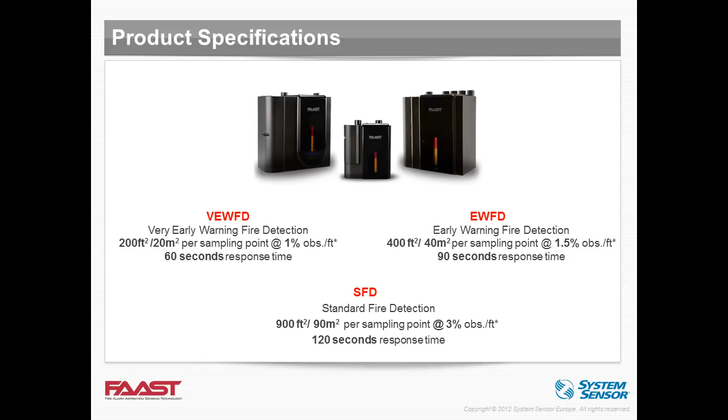For starters, I'd like to mention again how we position the holes of an aspirating system, which you're probably all familiar with. Every hole, every sampling port located on the pipe, reflects the positioning of a smoke detector, because this is what the aspiration system detects.

Obviously, you can make the distances or spacing smaller. You should not ever exceed the distances that the regulators, local AHJs, or regulations allow. If you consider that those small dots you saw in the previous slide were the spot or point detectors, when you connect the dots, you'd have exactly the same or very similar configuration on the ceiling or elsewhere, wherever required, where the sampling port is at the place of the smoke detector.

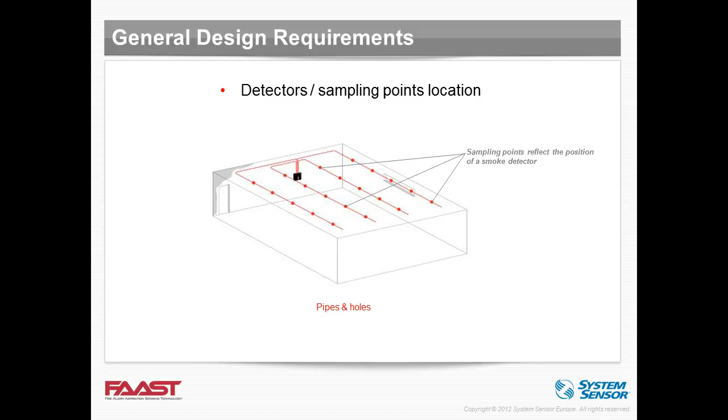In most regulations worldwide, the spacing between the holes reflects the class the unit works in. For standard fire detection in the UL world, the distance between sampling ports should not be larger than 30 feet, and from the wall it should be half of that, around 15 feet or 4.5 meters.

In EN54 worlds, like European countries, for Class C, which is the counterpart of standard fire detection, that distance in most European countries is 10 meters. Some countries have a different number.

Obviously, early warning fire detection has that distance smaller, from 30 to 20 feet and 10 feet from the wall, and very early warning has that distance made even smaller, to 14 feet between sampling ports and 7 feet from the wall, or in the EN54 world, in most countries, 5 meters and 2.5 meters from the wall.

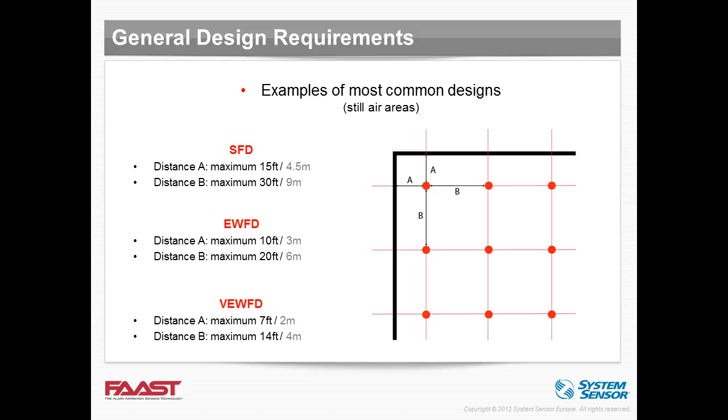So what does our PipeIQ do? It helps you design the system, configure the system, and monitor the system.

When you work with the software, whenever you hover over an individual icon, you get a prompt telling you what that icon means, so it's very easy to navigate across the software.

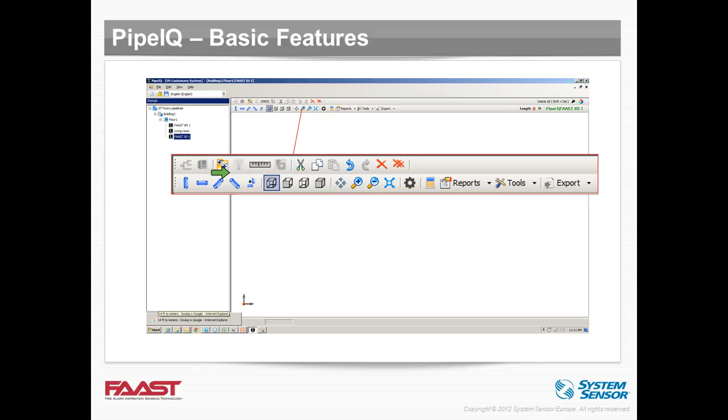When you design the system, you can design anything from a very simple rectangular single pipe to 4 pipes or 4 branch configurations. You want to be sure that what you've designed actually reflects the regulations, that all parameters are correct.

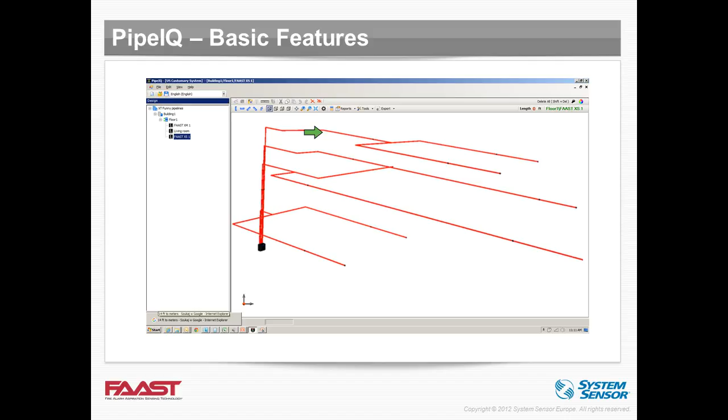By clicking the calculator button, it tells you if you've done something wrong. There was nothing wrong with the design shown in the previous slide, but I highlighted it specially so you could see clearly that if something is wrong, it will be immediately flagged, immediately highlighted in red, whatever parameter is wrong at that stage.

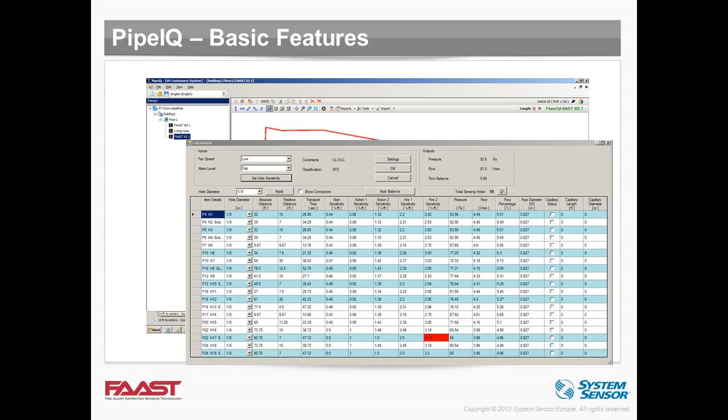To complement that design, as if it were your 3-dimensional paper, you have those two tabs. The first one, on the left-hand side, is the configuration tab, where you configure the software settings, the times, the sensitivities, and everything required to make the unit work correctly.

The other tab on the right-hand side is the monitoring tab, where when you connect to the unit, you can monitor in real time how the unit behaves, as if you were standing in front of it. It doesn't matter if the unit is 1,000 miles away, as long as you have connectivity over TCP/IP or USB for FAAST XM or XT, you are able to monitor the status, the event logs, etc. So let's get started.

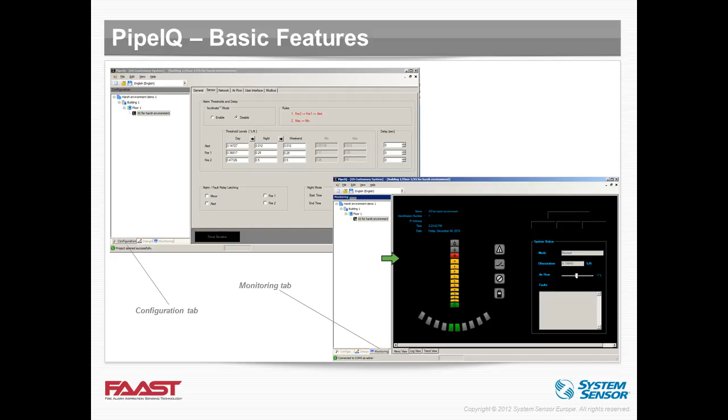Let me just share the screen with you, where I will show you my PipeIQ. I hope that some of you at least have the software installed on your computers, so you can replicate or copy what I'm doing on the screen.

So let's just start with opening a new project. I realize that there is some lag, some delay when I show things on the screen, so I'll try to respect it and give it at least a second before I click the next button. So let's call it webinar 1.

We acknowledge what System Sensor does and does not provide. We select the measuring system, either the US customary system or metric.

For now, let's stick to the US customary. Then we have the next window asking which of the FAAST units we want to work with. For starters, let's select FAAST XM. Click OK.

As I showed you before, we need to visualize where we want to position our holes. So probably you have it in your mind already. When you start designing the system, you first double click on your 3D paper, because the white space in front of you is the 3D paper.

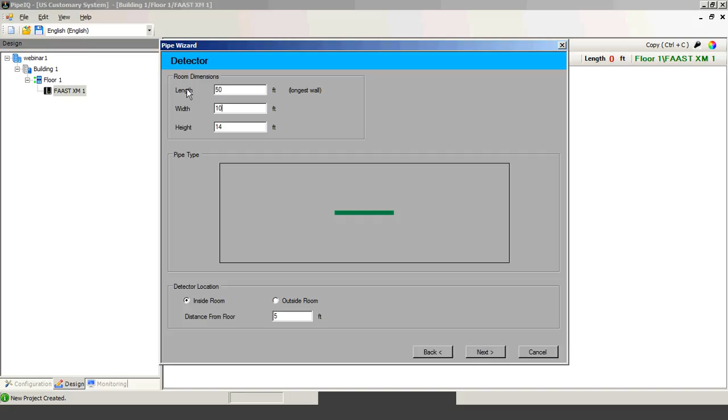Then you can select the pipe material, internal hole diameter. Let's select next, and let's take, for example, a space of 100 by 100 feet, or let's do it 50 by 50. Then it shows you what kind of configuration, what pipeline layout is suggested for that room size.

You can also choose between detector location inside or outside of the room. Please remember that when you locate the detector outside of the room, you need to go back with the exhaust pipe to the room that you draw the air from. You can also indicate what distance from the floor is required.

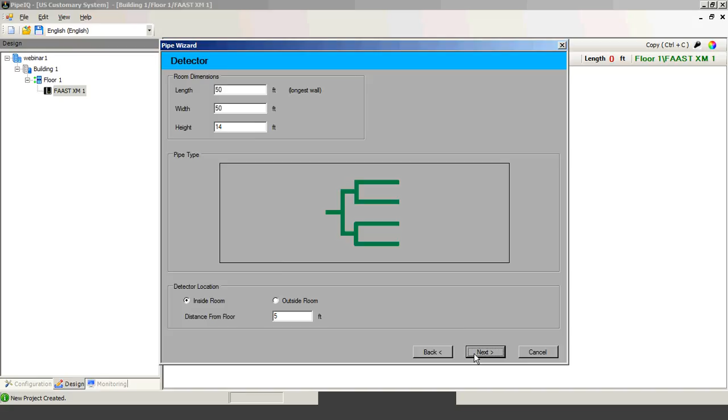In the metric world, it's usually around 1.5 meters. In US customary, it's around 5 feet. Then you click next, and it asks what is the positioning of the pipe, below or above the ceiling, or maybe below the floor if there are raised floors that you want to protect. So let's stick to the most common.

And then the pipe network direction that you want to see on the screen. Then when you select next, you have the summary, and when you click finish, you have the pre-designed system already on your screen.

Now those icons, the small cubicles, are the views that you can select. So this is the top view, this is the front view, and when I click on it, it changes. This is the right view, and this is the isometric or panoramic view.

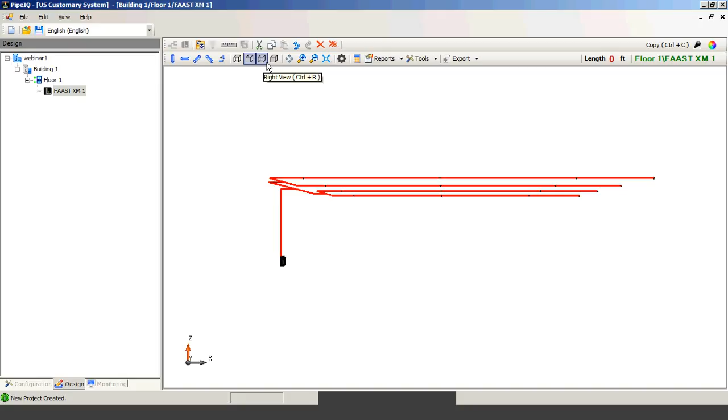Now, what you have pre-designed, you want to verify whether the parameters you designed are actually correct and suitable for the market you operate in. So when you click the small calculator, it shows you a problem because you have some red flagged items. This time you see that those 3 columns reflect the sensitivities.

In FAAST-XM we have 5 sensitivity levels. So the best and quickest way forward is when you want to set the sensitivity hole. We have selected this, which is the very early warning. Actually, we want it to be standard fire detection, but okay, let's go for the very early warning. When you select the whole sensitivity, it suggests what sensitivities could be best for that application.

So for the very early warning in NFPA 76, you need the pre-alarm at 0.2 obscuration per foot, and a fire 1, which is the alarm triggering level, you need the 1%. You can, of course, change it. So from 0.5, you can change it to 0.6, etc. And then you want to export it into the unit threshold. So you calculate the unit threshold, press OK, and then you have all sensitivity levels worked out.

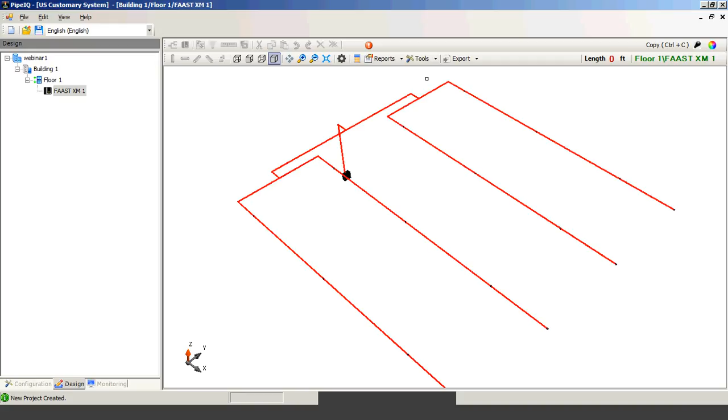Now, how about if you want to change the way the system looks or the pipeline layout looks? It's enough to double-click on the pipe, and you can change the length, let's say from 39.5 feet to 55. It might tell us that we go outside of the very early warning tolerances. And then when you click Update Holes, it should calculate the holes which are applicable to that very standard or that very classification. And then you can see now that we have made the top pipe longer.

If you press this icon, you can then change the location of the entire pipe network. If you grow too far, if your network is too big and you want to see the whole extent of it, you then press that very button, which is like zoom to fit. Okay, now what else can you do with the network?

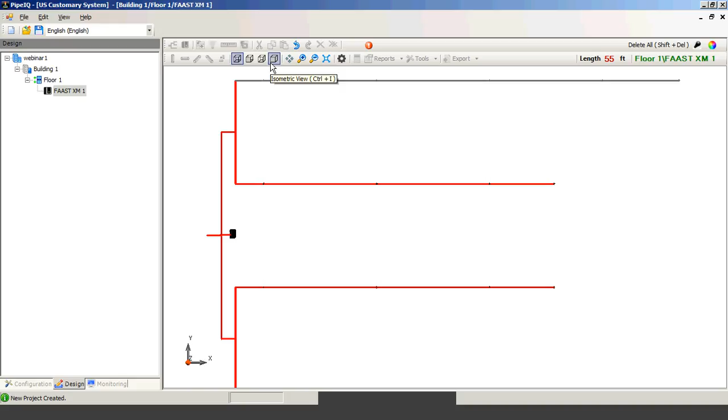When you double click on the pipe again, you can add capillaries. You can add capillaries individually. You can change the lengths. You can add all capillaries by pressing the add capillary on top of the column, and then it adds a capillary to every hole that you predefined before. And of course, you can then change it as well.

You can also change the location of holes. So when you click on the relative distance column, the cell that you want to move, and then you say, well, rather than 14 feet the spacing, you want to do like 13. You can change it. You can also add hole.

You add hole by clicking on the preceding hole, insert, and then this space is split into two. However, you can again change it. So, for example, we'll have, say, 12 feet, and then it should recalculate the distance of the next hole.

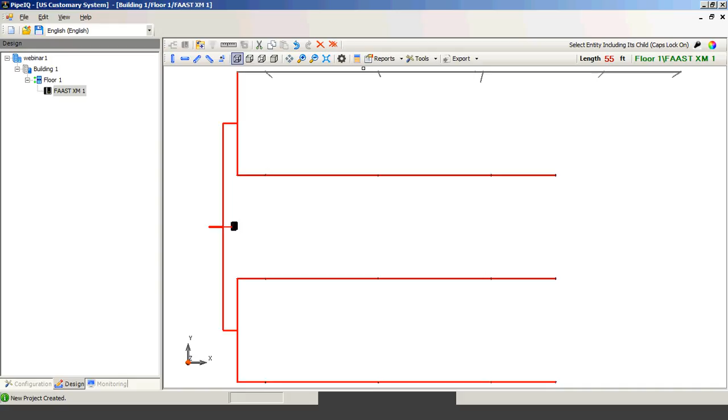Okay, so when you've done some changes, you then again want to click to see if the changes that you've done had some impact on your configuration. And of course, we've had, because we added holes, we have made one of the pipes longer. We've added capillaries, so that had an impact on our system.

Okay, so then again, now we see that it's only the sensitivities that are in question here. So we set the hole sensitivity again, and let's see the kind of default for class A or for very early warning. When we translate it, it clarifies the whole situation again. Obviously, you can push the system to its limits. However, sometimes it's not necessary.

I just want to show you one more thing. When you imagine that you have the wrong type of hole size, which may have an impact on the airflow, on the pressures, they will be flagged immediately by pressing the auto balance button. In most of the systems, that should help very easily.

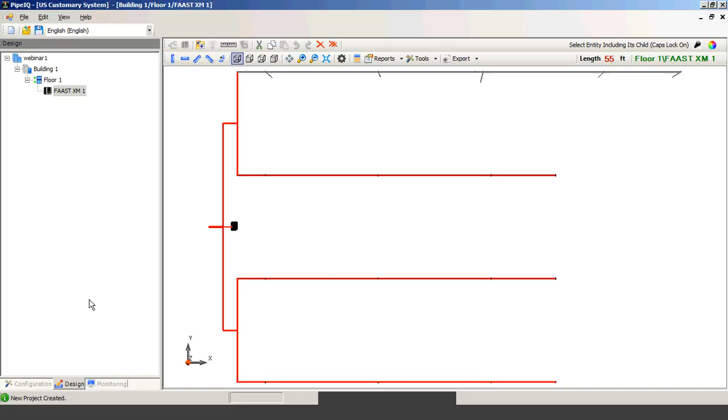Okay, so let's now just build the system from scratch. So I need to go back to the configuration window, or configuration tab, click on the floor, right click on the floor, and let's add FAAST XT. FAAST XT is our 4-port unit, which can take up to 28.8 thousand square feet.

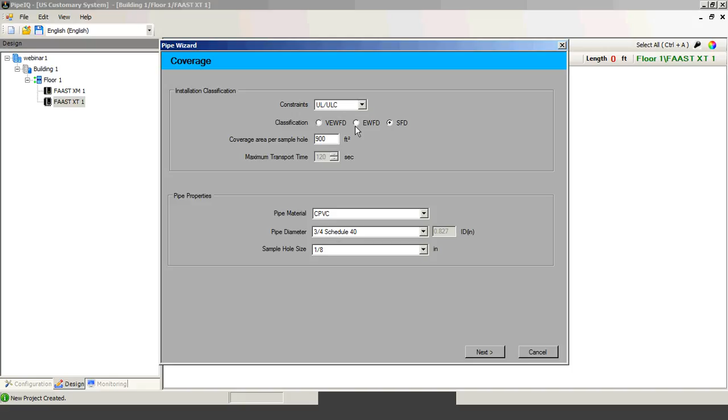When you click on it, it again opens up a possibility of a new drawing. So this one obviously is much bigger. So when we build it to say 200 feet by 100 feet, you can select the number of ports. It does exactly the same, but to a much greater degree.

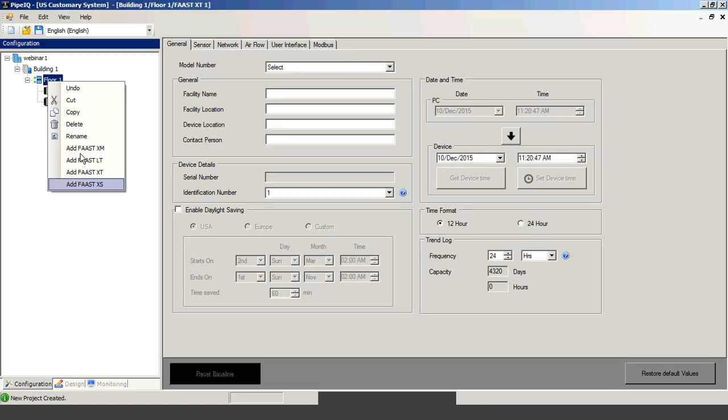Okay, and last one, I will add it again. I will add the small unit. So I go to configuration, I right click on the floor. I will add our small unit, FAAST XS. And then when I do the design, I need to click on the unit I want to design. I click on my 3D drawing paper and I start design. So I select the detector first.

It appears somewhere here there's quite a small one, but let's make it bigger. And I start drawing manually the system. So usually the first pipe is going vertical.

Always it's vertical, either down, you can have the bottom or the top connection, which is very handy, especially when you have raised floor applications, or when you have to use the water traps. So you can select the entry port by double clicking on the unit. This is when you select the top, or this is when you select the bottom. So let's select the top, apply.

We now select the pipe that we want to connect, and please remember that the pipe that you select is what you see. So sometimes, even if you want to design a horizontal piping system, when you have the plan view, something that goes from bottom to top is a horizontal line. Let me just show you, not to make any confusion.

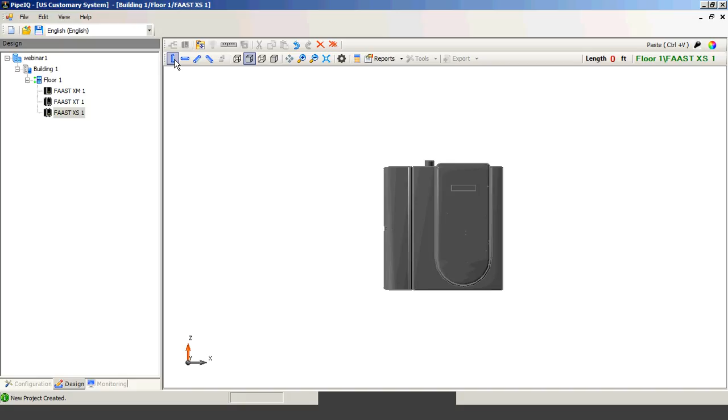So let's select the vertical pipe. The first pipe can be shorter, so let's make it, say, 10 feet. It will have no holes. It will go from bottom to top, so it will go up. You can also change it from top to bottom, but this time we will select from bottom to top. We select OK.

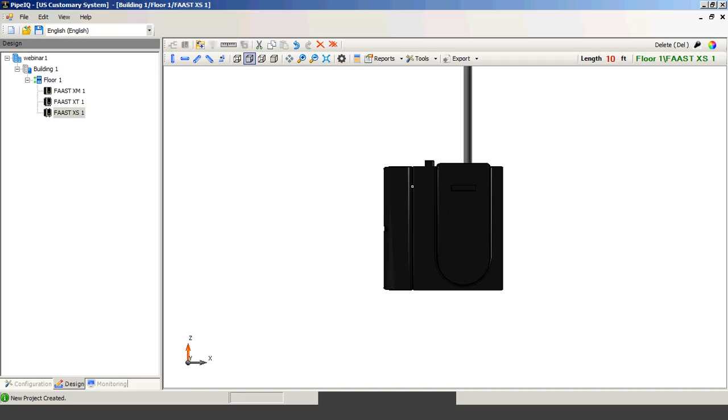And you can either connect it manually or with the control button. If you click on the device or on the parent pipe that you want to connect, you can connect it automatically by pressing the icon. It's the fifth icon from the left, connect pipes or snap on. And when you click on it, it connects the pipe automatically. I will make it zoom fit so you have a better view.

Let's add 2 pipes horizontally, one to the left, one to the right. So I'm selecting the horizontal pipe, let's make it like 10 feet. The first one will go from left to right. This one will not have holes, so I click on it. And you see you have that pipe, which is the child pipe. And then with the control button, I select the parent pipe, and then I click the connect pipes icon.

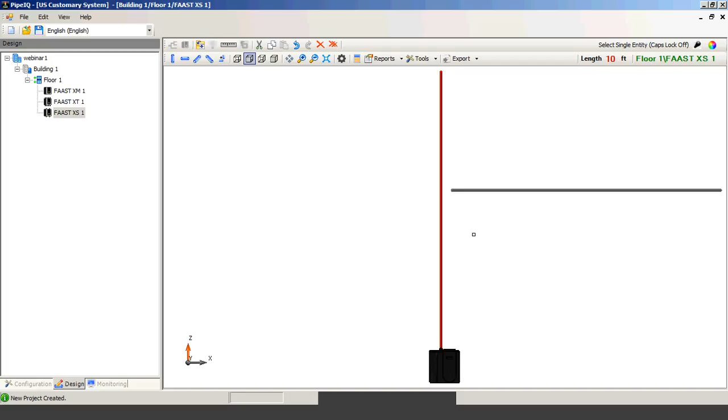It connects, oops, the wrong way around. Sorry. And then I select the other one. This time we'll go from right to left. Let's make it again 10 feet. Okay, I select the parent pipe.

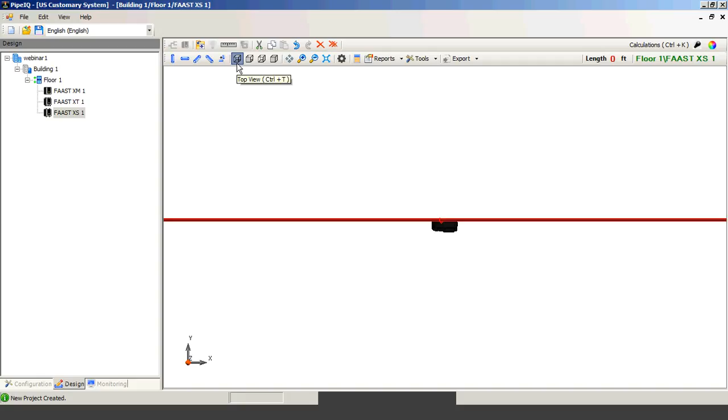Click on. And now let me select the top view because I want to draw the horizontal pipes that go away from the unit. So whilst in real life they are the horizontal pipes, on our 3D paper here with this view, it will actually be vertical.

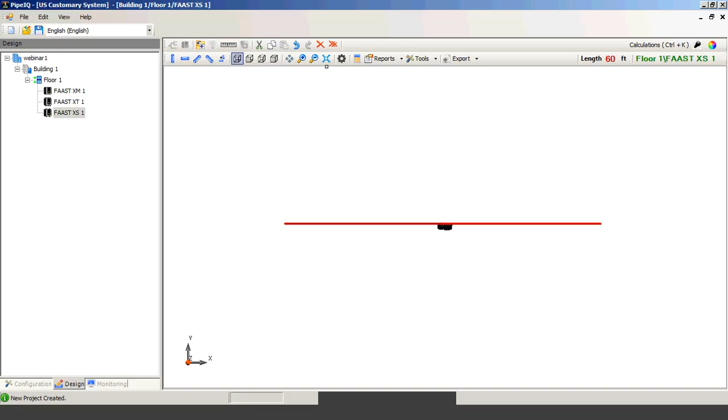But then again, let's connect it quite quickly. Connect pipes. And then we have the first connection of this horizontal pipe. We can also copy and paste. When I click on the pipe, selecting it, and I select this icon, which is copy, and then I select the next one to the right, which is paste, I have just made a new pipe which is identical to the one that I've drawn before.

And this is how we get our manual design. I will show you in a few seconds how we can modify it.

Again, when we want to see the calculations, we can set the sensitivity alert of, let's say, 1.2, fire 1 at, let's say, 1.8, and fire 2 at 1%, and then you translate it into the unit. And this is how you solve the sensitivity problems. Of course, because of the multiple levels of sensitivity, you can tailor the response times, how sensitive the unit is at each threshold, to the applications that you're dealing with.

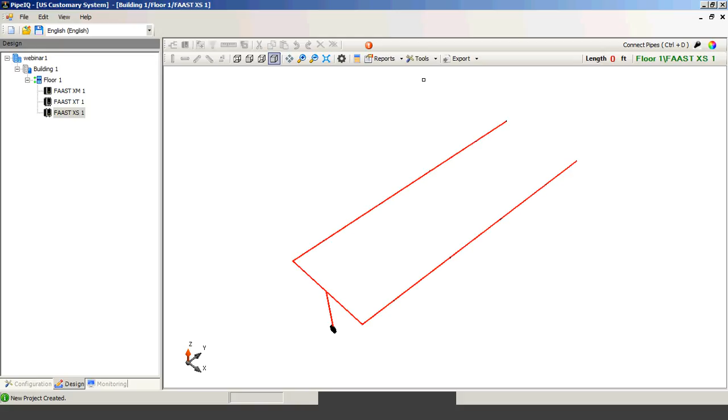Okay, so now let's try to rework our existing design. Let's select again the top view, and when I double click on our unit, let's just remove the end cap so it's easier to calculate, and let's just build it a bit bigger. So when we select the settings button, let's select the standard fire detection so we can build it to a much greater level.

Okay, so I double click on the pipe, and then I will remind you how to add holes. So by clicking on the hole and then adding insert hole, you add it. It splits the distance by half. Okay, so we can adjust it by adding, for example, 10 feet.

Let's change it to a capillary, and let's make this capillary, say, 7 feet long. Okay, you can also change the hole diameter, like a general or generic hole diameter. We usually start with 1/8 of an inch or 3.5 millimeters in a metric system, but you can obviously change it. So let's try to make the system less stable.

When I update the holes, it will of course change the numbers, so I want to add that hole again. Insert, and I want to change it to, I think it was 10, and there was a capillary of, let's say, 7 feet.

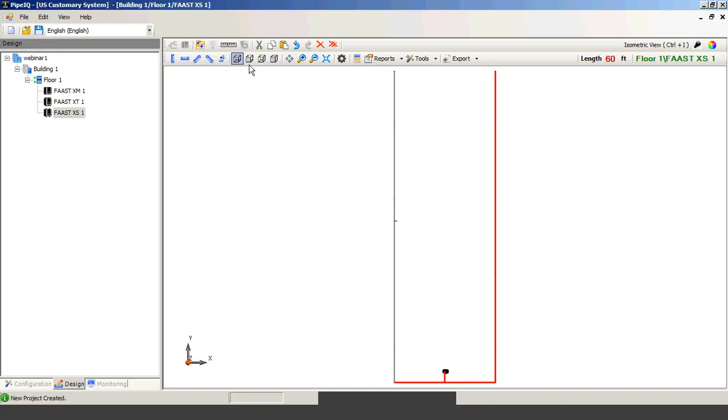I can also add a small pipe at the end of that very pipe. Let me select the front view, or the side view, and I will add a small pipe which will go up, let's say, by 1 foot from bottom to top. I will click on that one.

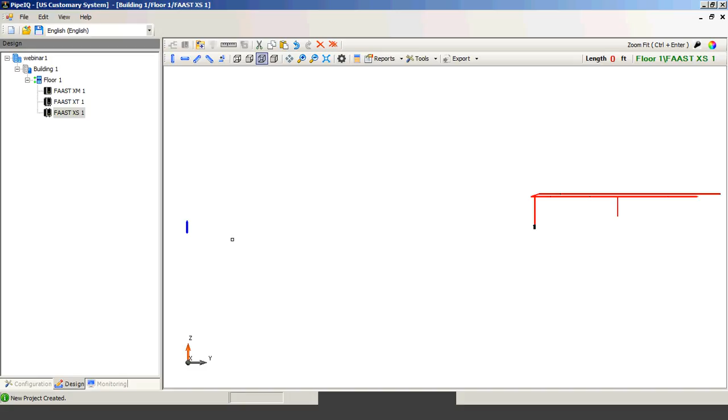Oops, sorry, not this one. Excuse me, this is my pipe. I will make it full screen. Is this the pipe with no end cap? No, this is the pipe with no end cap. Oh, I need to remove the end cap.

And then I click on the child, click on the parent, and add it. Okay, and then I will make it larger again, and let's just add one more pipe, which will be, say, 10 feet with an end cap.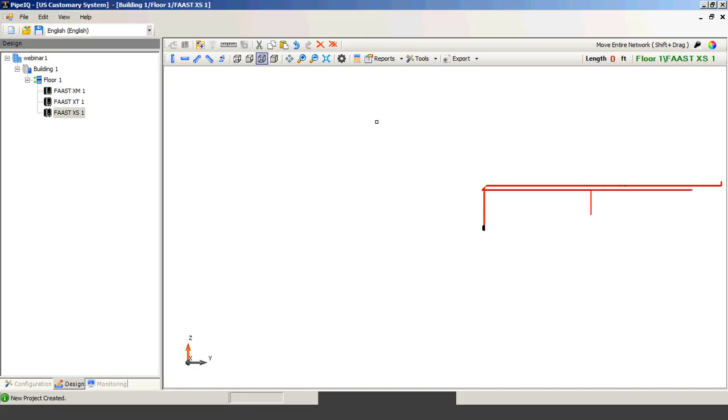We will update the hole, but it will not allow us at this stage because we have too large distances. So let's make those distances smaller. Update holes, press OK, and then we can add it to this small stub pipe at the end of the pipe. This is how we have designed our kind of unbalanced, unsymmetrical system.

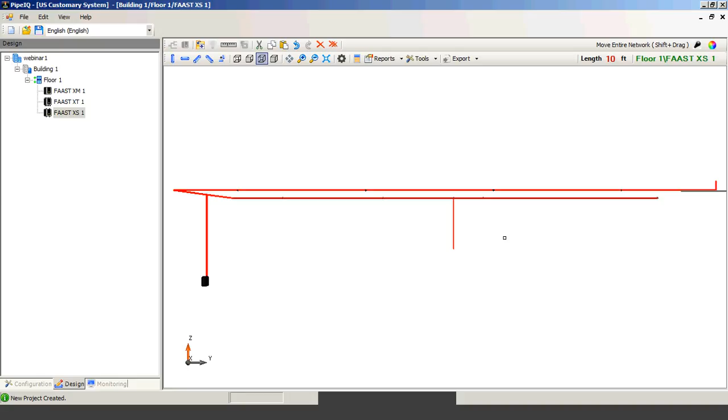Let's check if it works. Well, we have one problem with the pressure. So what can we do? We can either auto balance, but I don't want to do it now because I want to show you how we can balance the system manually. So you can, for example, change the size of the hole, make it smaller, make it larger, and this way you can balance the system manually.

Or let's make it unbalanced again. You press the auto balance button, and then it balances it automatically.

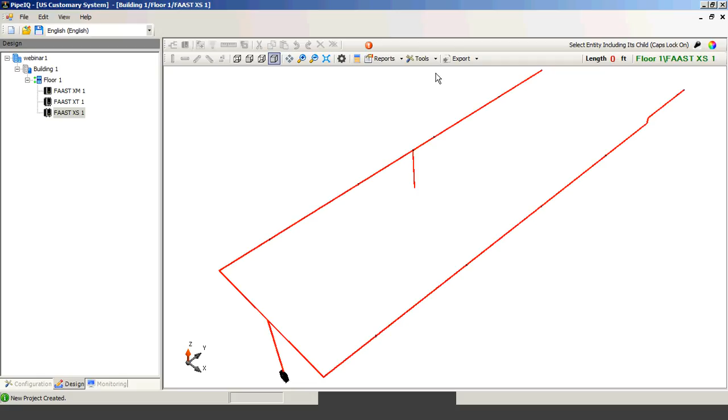Now you can also copy and move the entire network. So imagine that you have a large design, and this design is repeatable. Rather than redesigning it pipe after pipe, you can select all of those pipes.

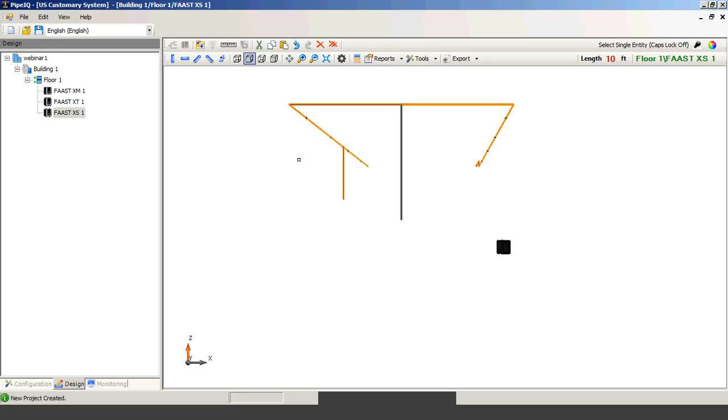Or you can use the button which is called Select All, and then you copy it. And then, for example, if you want to put it into a different configuration, you right-click on the floor. Let's add it now to FAAST XM, and go into configuration, XM2.

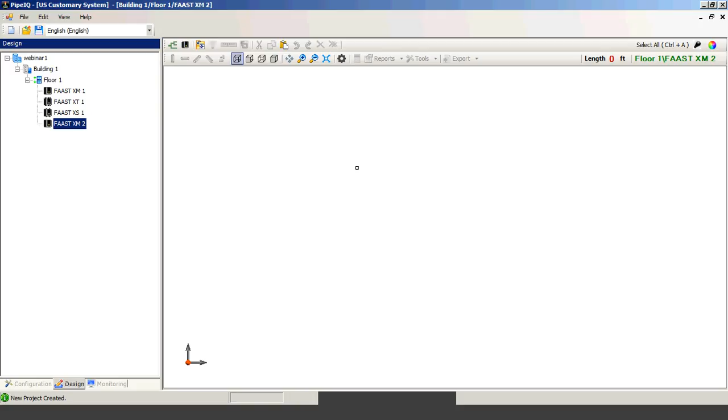We click on the paper and add a detector. Let's make it larger. When you paste it, you have the entire selection on the screen, and you can connect it very easily. So it saves a lot of time when you have a multiple detector system with a repeatable layout.

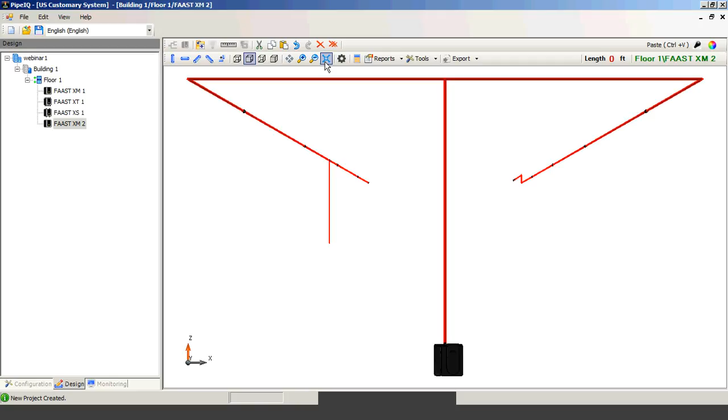Now, once you design the system, let's just close this one because I have disconnected it from the unit. I will select a different view. I will select the pipe I want to connect, select the unit I want to connect to, and I will use the Connect Pipes button.

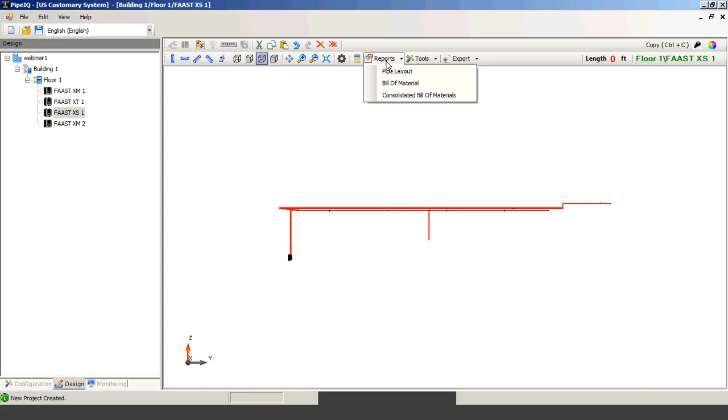Once you design the whole system, you want to see what you have designed and how it translates into a bill of materials, for example. So you can click the report buttons, and then click bill of materials, and by generating it, you can have, in a snapshot, in a question of seconds, information of what you have designed and what needs to be ordered.

Please remember that very often local suppliers in Europe or in the US, or wherever you select to purchase the pipes and accessories outside of our company, those sizes of pipes, lengths, etc., or even minimum order quantities may vary. So please make sure that you order a sufficient number of pipes, accessories, fittings, etc. That's very important. This is for reference only, but it does provide you with a very good overview of what needs to be done.

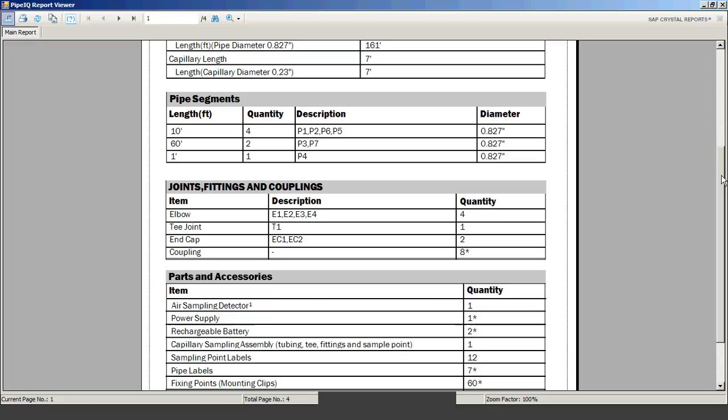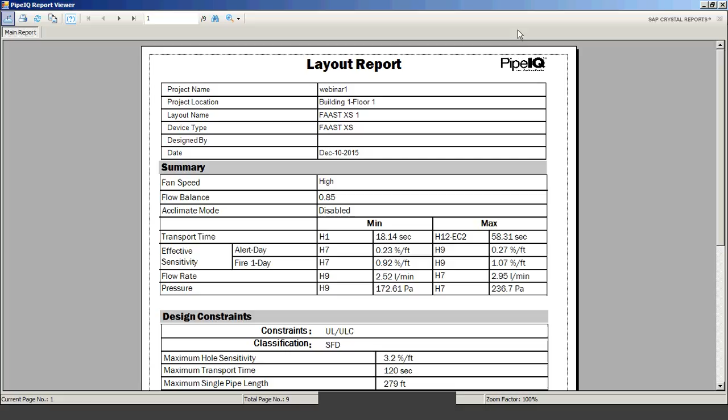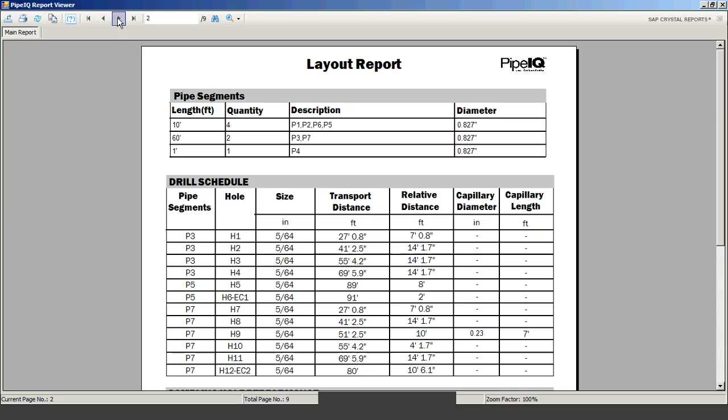You can also select the pipeline layout, which for that system, you want to be sure that you print out and give it to a fire marshal or authority having jurisdiction for verification that your design is actually correct. So you have all the parameters presented. At each hole individually, you have the transportation time, the pressures, the sensitivities, and also the positioning of each hole or parameter on the system.

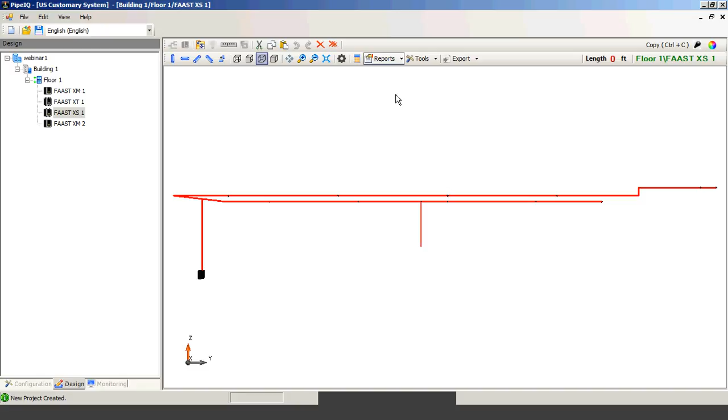The last report you can make, which is very helpful when you have a multiple unit system, is the consolidated bill of materials. You don't have to print out each individual unit with its own accessories or pipes, but can add them all together, either selectively or by clicking select all, and then generate. In a matter of several seconds per detector, you'll have the same consolidated reports telling you how many pipes, elbows, etc. you need.

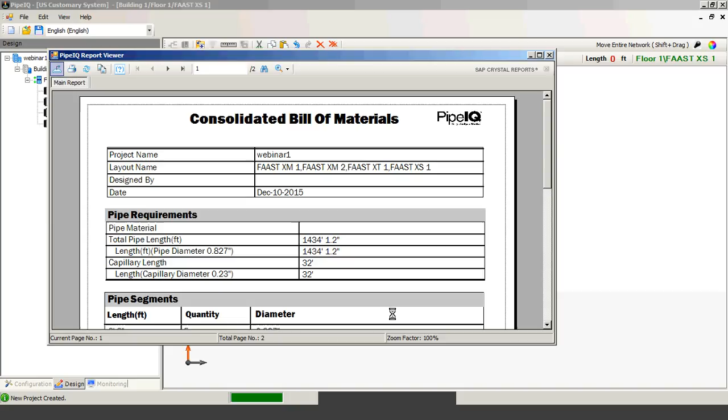Okay, let me just switch for a few moments to the team room if there are any questions so far.

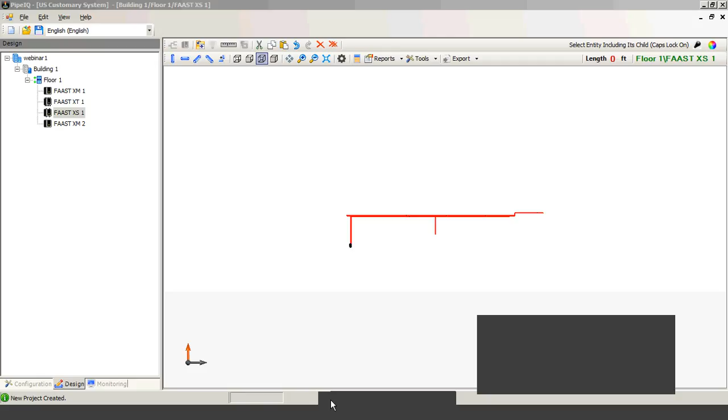So, hole sensitivity: imagine that each port, each sampling port or sampling hole, is a smoke detector. You want to be sure that each sampling point detects smoke with appropriate obscuration. When you select the hole sensitivity column, the target sensitivity is the sampling point sensitivity. There's a small difference between the UL world and the EN54 world, because UL testing is all about unit sensitivity, which will be lower than 0.5 obscuration per foot. But when you consider that the unit draws air and samples it through 10, 5, or 20 sampling ports, it will dilute the smoke traveling through the pipelines. So the threshold sensitivity is the unit sensitivity sufficient to detect that very small obscuration of smoke drawn into each individual pipe.

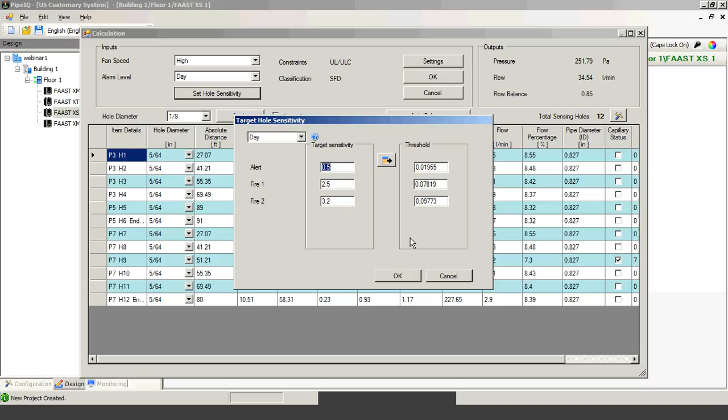For your reference, a spot detector is around 3 to 10% obscuration per foot, and in EN54 it's about 1.5 to 2% obscuration per meter. So you can imagine having a sensitivity of 0.5, or for very early warning, if you change the settings to very early warning, each sampling port can detect sensitivity of 100 times or more when it comes to smoke presence. You can then tailor your general sensitivity scenario, or fire detection risk scenario, to the actual needs of a given project.

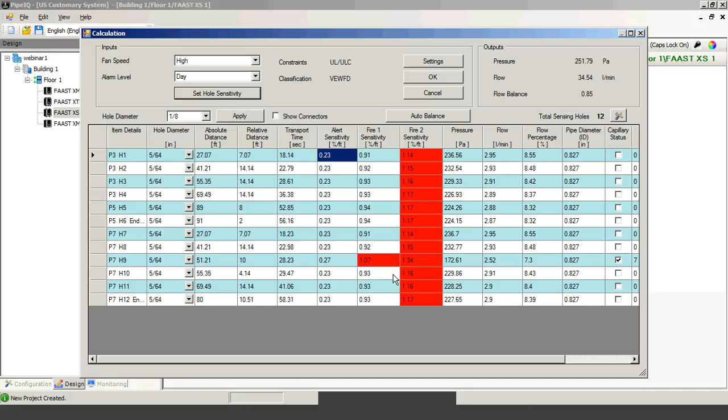That's a very important tab as well. Now, what can we configure? Let's start from the top. We have FAAST XM. We supply our aspiration system to a number of OEM partners, so they can be conventional or addressable. As far as I'm concerned, in Europe we currently only supply the conventional variant, so this is exactly what you can select. These are the FAAST XM names. If you're purchasing the conventional, you select, say, 8100. If you're working in China, you'd select one of those, the JT1 GD, etc. You'll probably know very well which model you need to select. Then you enter the facility name, facility location, and other information that identifies the unit in the project or on site. You can also set the time, enable daylight saving time, and select the frequency of the trend log.

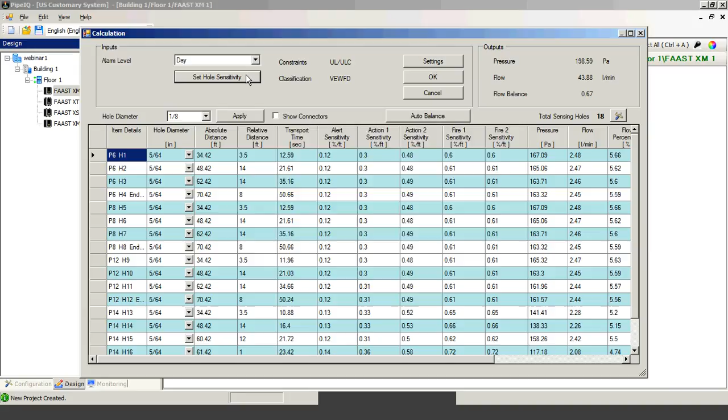Now, the next tab is called Sensor, and this is where you can manually program or configure the sensitivity thresholds of the unit. This is a historical tab from the old days when we had to program unit sensitivity directly. Now we've made everybody's work much easier, so you don't have to guess and double-check what sensitivity will impact the hole sensitivity, because as I showed you before, in design mode with the calculator button, you select the hole sensitivity and it translates into the threshold. It's not redundant, but we left it for legacy reasons, because it's much easier now to predefine hole sensitivities rather than unit sensitivities. When you have different environments during the day, you can also transfer the day sensitivities into night.

You can also program differently for night or day, and you can certainly add delays if you want to have proper smoke risk management by adjusting the sensitivity settings.

You can also enable the acclimate mode. This is used when you have the risk of a changing environment and you want the unit to find the best and most robust way to deal with it when detecting smoke. You select the boundaries between each individual threshold you want the unit to look at in the environment, and the unit monitors the environment for 24 hours for the most optimum response to smoke or nuisance dust levels, further reducing the risk of nuisance alarms.

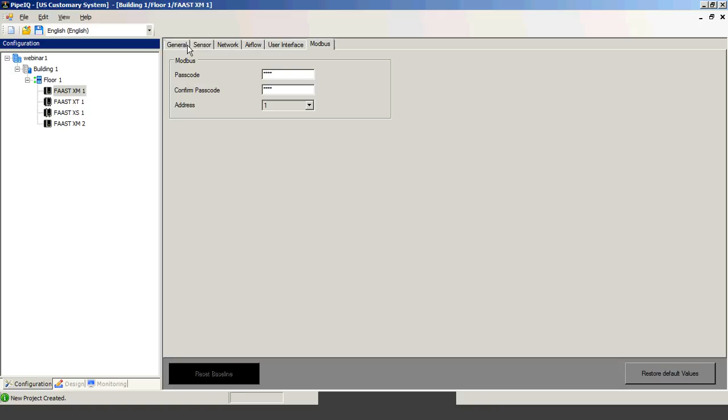There was something I wanted to show you... I wanted to show you something with the FAAST XS and XT.

You remember that FAAST XM and XT have 5 sensitivity levels. FAAST XS, our small unit, has 3 sensitivity levels.

Also, with the configuration, you can select whether the relays in the unit, 5 for FAAST XS or 8 for FAAST XM and XT, are latching or non-latching.

Okay, so let's just go for a moment to questions.

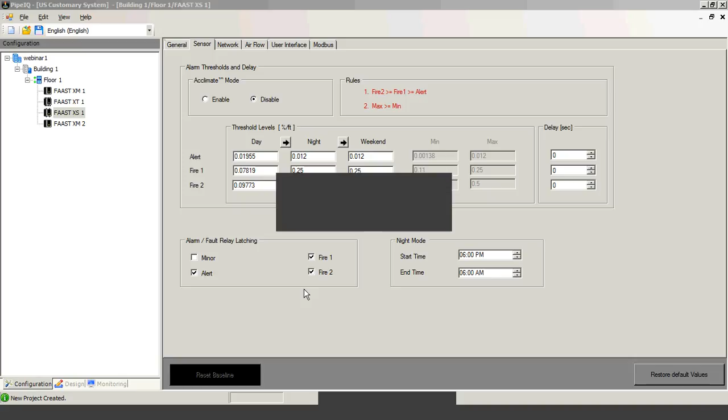So the next question that came up was about hole spacing, specifically how do I change one hole spacing without having to change all subsequent hole spacing? Maybe the third hole down on a pipe, but he's finding that it might influence the second and the fourth hole.

Okay, let me go into the unit, let's make it larger, let's double click. So let's say when you change the hole spacing manually, from 14, I'll change it to 11, it will only affect the next hole in line. So when you press tab, it'll change to 2.14.

So you will need to change it to your manual location of the hole. But it will always, when you do it manually, change the next hole in line. You have to remember that.

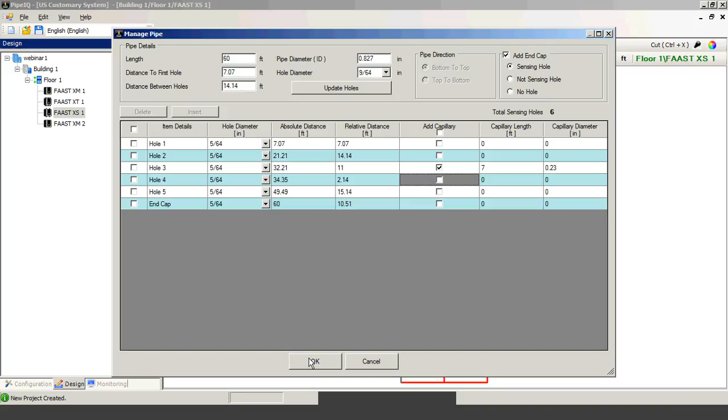I just want to close with two things about the connectivity. When you design and configure the system, you want to upload the configuration onto the unit, and then monitor it. You upload the system by right-clicking on the unit you want to connect.

The FAAST XM has only TCP/IP connectivity, over Ethernet. The XT and XS also have USB connection. If you click connect, it will ask how you want to connect. If you select USB and admin, you need a password - the default is the word 'password' - then click connect. I don't have the unit connected right now, but you can see the unit connects.

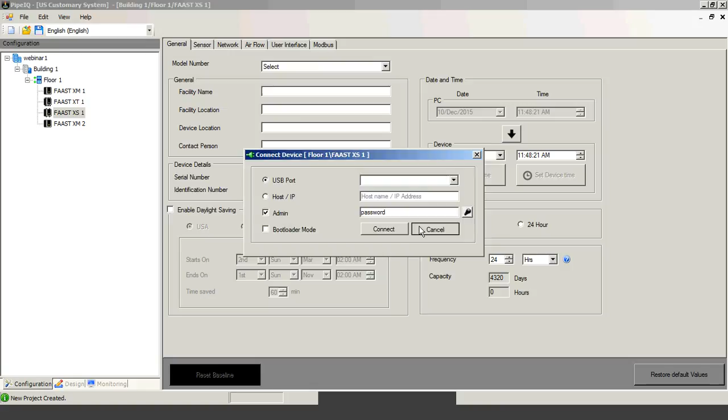When you connect the unit, you enable the upload configuration with a right click. It will be highlighted as upload, then you click upload device, upload configuration. You can also download the configuration. If you don't know or forget what configuration you uploaded before - whether yesterday or 2 or 3 years ago - you can always download it as well. There is an option for that.

And then the last tab is the monitoring. When you have that tab in front of you, it will replicate whatever is on the wall, how the unit behaves, what the unit reports, etc. So this is basically it when it comes to design.

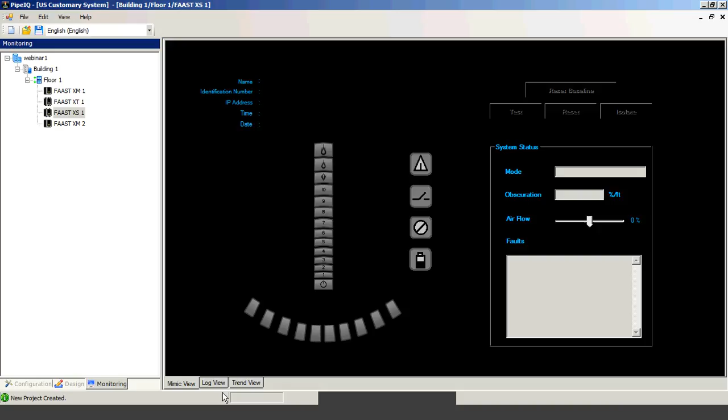One last thing I want to show you is how you connect the pipe from the bottom. Let's create one last unit. I will click on the floor, add FAAST XS, click on design FAAST XS 2, click on the detector, and add the unit manually. I will make it slightly larger.

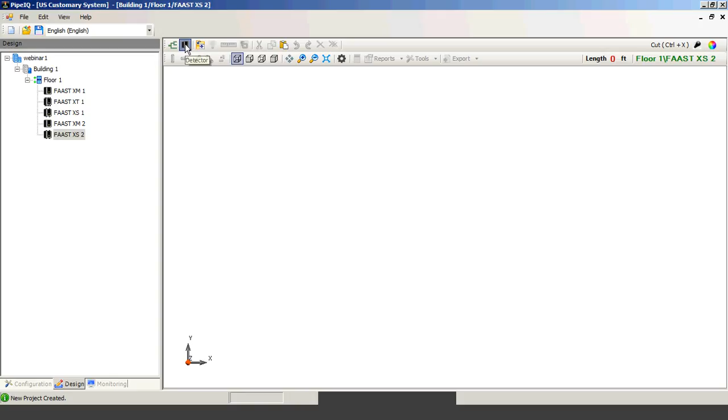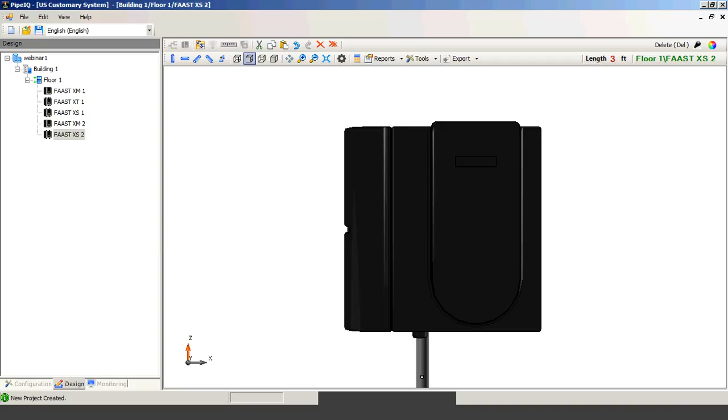By double clicking on the unit, I select that I want the bottom entry of the pipe, apply, and then select my first pipe - let's do it at 3 feet. This time it will be from top to bottom. I have the pipe which I can connect either manually or automatically. Click, and this is how you connect for the application when you need the bottom entry of the pipe. This is very helpful for raised floor protection, or when you have the water trap installed on the system.